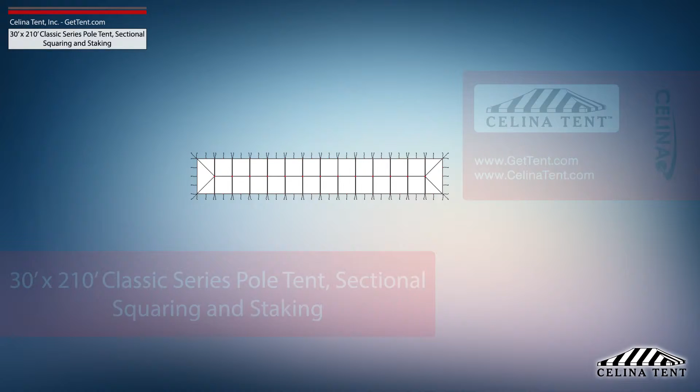This video covers squaring and 5-foot staking applicable to a sectional 30-foot by 210-foot Classic Series pole tent from Celina Tent. 5-foot staking is standard for tents with an eave height of 7 or 8 feet and would need to be adjusted for eave heights other than this standard.

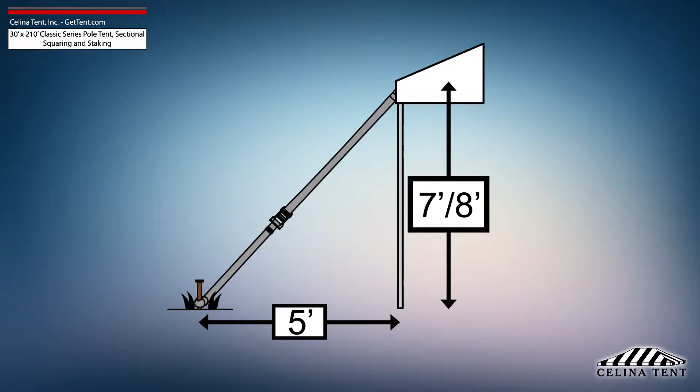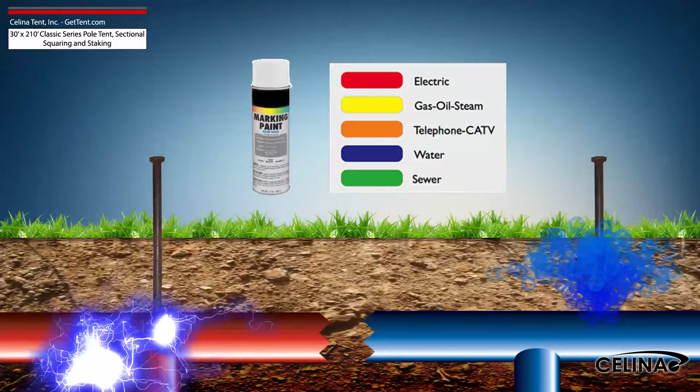Tent squaring allows the installer to accurately place all tent hardware and install tent stakes prior to beginning setup, and helps let them avoid any marked underground utilities. Utilities must be marked by your state's local utility services prior to any tent installation.

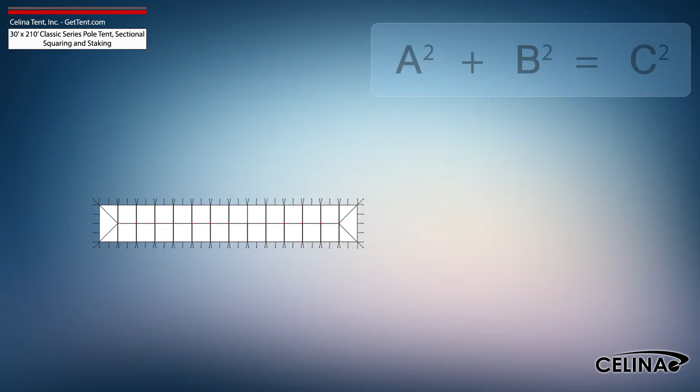Using the Pythagorean theorem and adjusting out for 5-foot staking, the entire tent footprint would be 40 foot by 220 foot, with a 223 foot 7-inch diagonal length.

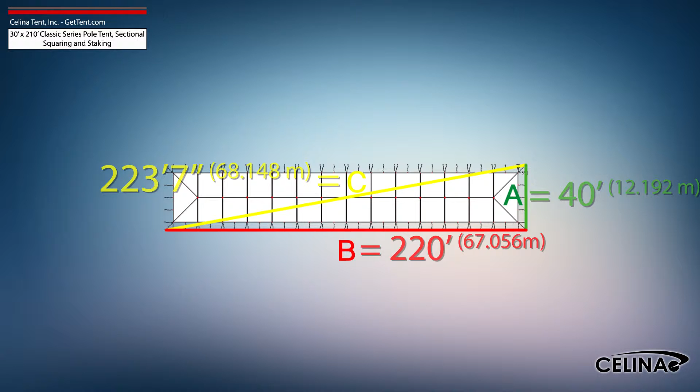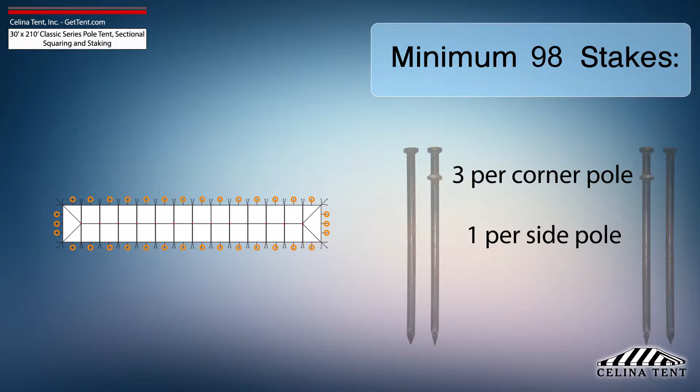Celina recommends that a 30 foot by 210 foot Classic Series pole tent receives a minimum of 98 stakes: 3 stakes for each corner pole, 1 stake for each side pole, and 2 stakes for each side pole at laceline locations.

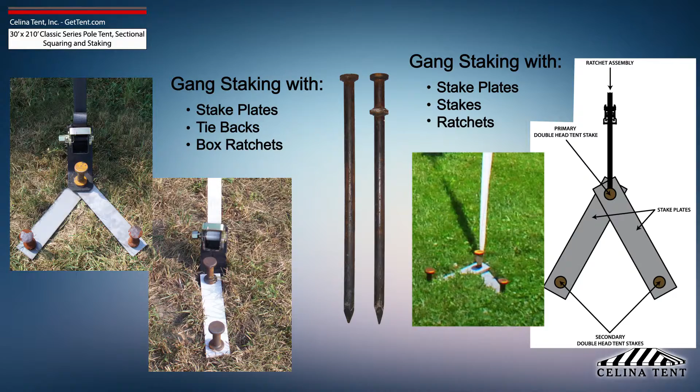This amount of stakes provides the minimum amount of security for a pole tent of this size. Additional staking is required for any site that doesn't meet optimal soil conditions. Tent staking is the most important safety procedure during tent installation.

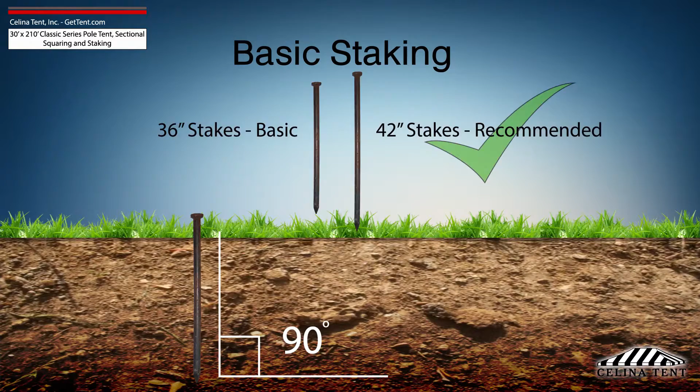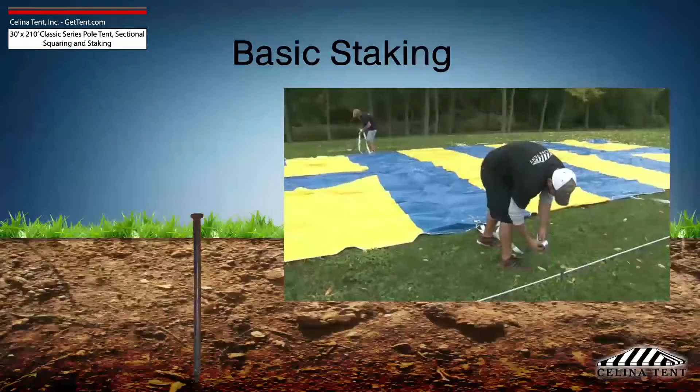Tent stakes should be driven vertically so that the stake is as close to the ground as possible with space to tie on a strap. Any length of stake protruding from the ground that is more than 6 inches will have detrimental effects on the holding power of the stake. Attach the ratchet strap or rope as close to the ground as possible to reduce strain on the stake.

It is the installer's duty to inspect the soil conditions and possible weather effects for the duration of the tent installation. For water-saturated or loose soil, more tent stakes are required to achieve adequate anchoring.

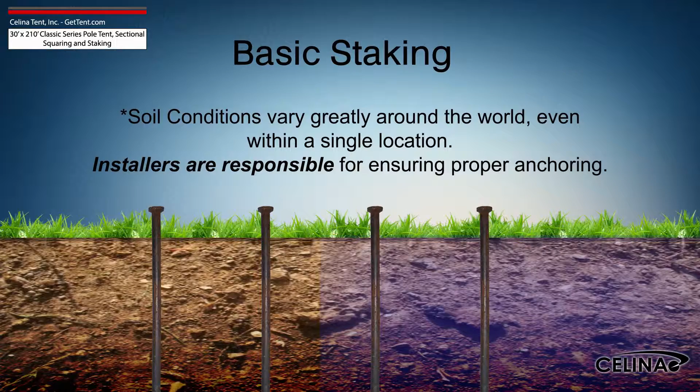Staking may be increased using dual stakes and a staking plate, or gang staking utilizing 2 staking plates and 3 stakes.